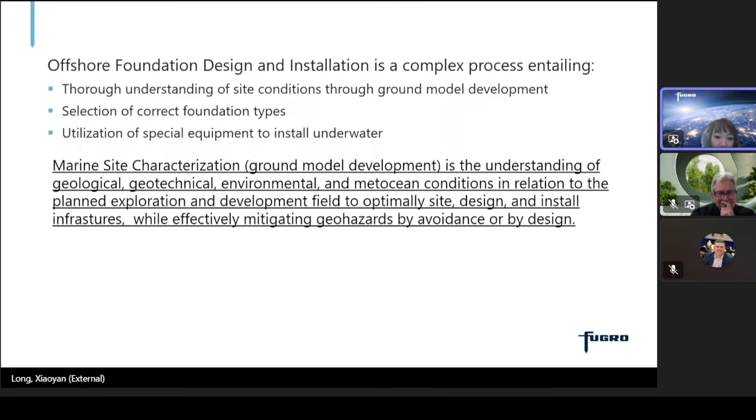Okay, so in the industry, typically we use what we call the phased diagnostic and geodata integration approach to develop a ground model. We also typically use some kind of GIS tool, so we can develop a comprehensive ground model, which will be able to identify, map, and assess the geotechnical constraints and also the existence of geohazards.

For the geophysical site investigation, we normally utilize echo sounder, side scan sonar, sub-bottom profiler, and 2D or 3D multi-channel seismic reflection survey. For geotechnical site investigation, we normally use in-situ testing, such as CPT, cone penetration test, PS logging and in-situ vane shear. We can also do sampling and laboratory testing to obtain the geotechnical data and the soil properties.

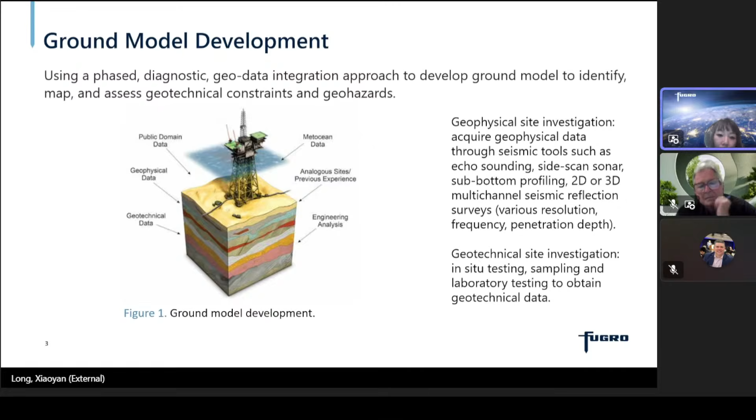So for offshore foundation design, basically two aspects need to be considered. First, we need to ensure the foundation will have sufficient holding capacity. Industry design guidance such as API, American Petroleum Institute, or ISO, International Organization for Standardization, have standards that specify the minimum required factor of safety through the entire design life, based on the different environmental loading categories. For the holding capacity analysis, we need to consider different types of environmental loading conditions such as static, cyclic, and dynamic loads.

Also for foundation design, we need to consider the installability. Even if the foundation will have sufficient holding capacity, what if the foundation cannot be installed into the seabed to meet the target depth? So basically the installability, and also whether the foundation can be safely retrieved or removed in case it needs to be. For example, if we install a suction pile and it has a little bit of tilt, so it doesn't meet the installation tolerance, then the foundation needs to be retrieved.

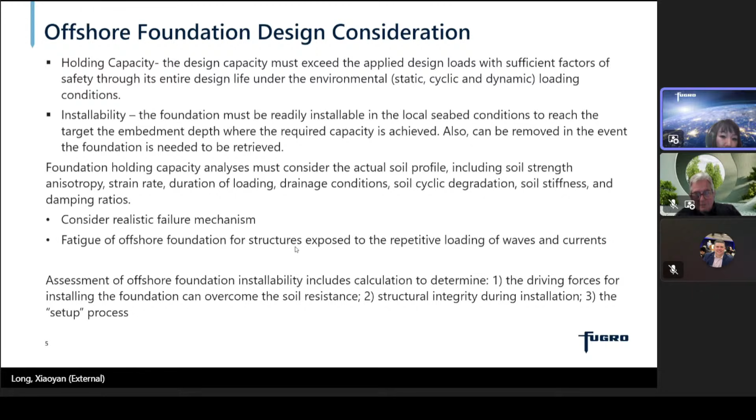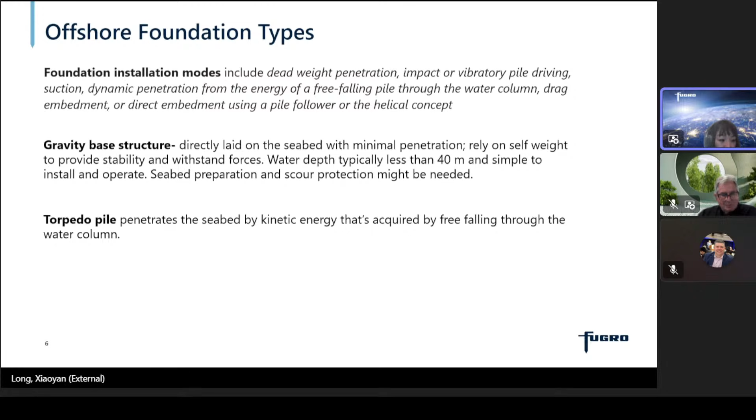For driven piles, we also need to consider friction fatigue, which is a degradation of the shaft resistance because of the repetitive hammering impact, and also the setup process.

For installation of suction piles in sand, we need to consider the interaction between the shaft and the tip. Also, because of seepage, there is an upward hydraulic gradient, which will cause effective stress reduction inside the pile.

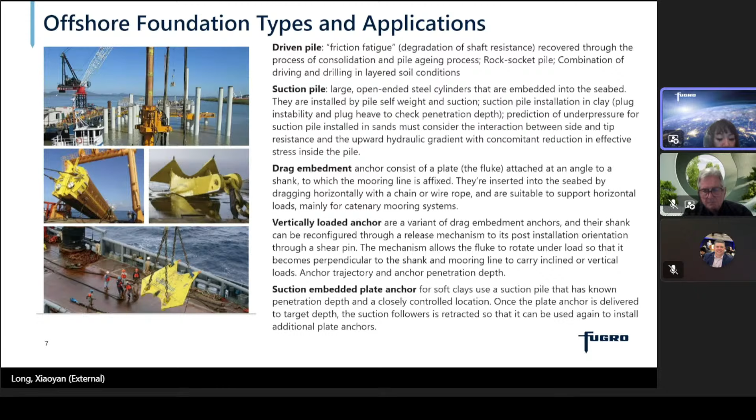Also shown here is the suction embedded plate anchor, which we call the SEPLA. SEPLA is actually a patent of InterMoor. Typically the SEPLA mainly targets soft clays. They use a suction pile as a follower to deliver the plate anchor to the target depth. And the suction follower can be retracted, so it can be utilized later at a different site.

For offshore drilling rigs, the spudcan foundation is very typical. A spudcan foundation is basically a saucer-shaped foundation. It can penetrate several tens of meters. The spudcan penetration process is affected by the spudcan geometry, metocean conditions, the holding period, the preloading sequence, and sometimes the existence of previous footprints, because of the structure-spudcan interaction. If we have previous footprints or nearby foundations, they could cause interaction issues, causing shear strength reduction, and compromising the spudcan foundation capacity behavior.

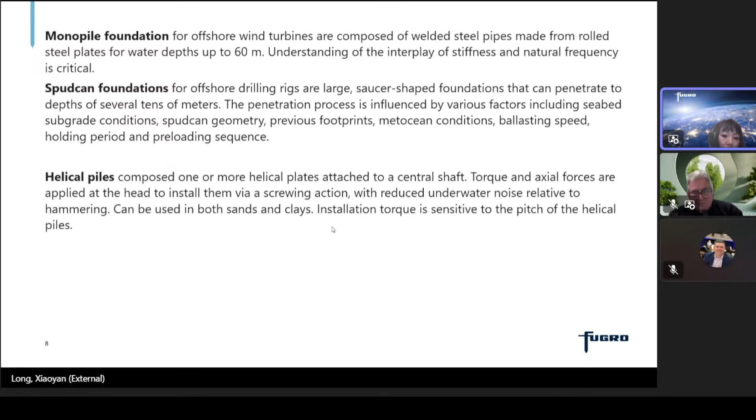So as shown in the previous slides, we have quite a few offshore foundation types to select from when we start the design process. For what we call the KPI, key performance index, of the offshore foundation, we need to consider the foundation holding capacity and the design condition. Basically, we need to consider the capacity efficiency, which is defined as the capacity divided by the foundation weight.

We also need to consider whether the foundation can be installed at a precise location. For example, a suction pile performs very well in terms of precision of positioning. However, with a drag embedded anchor, it's difficult to put the anchor in a precise location, so there may be some offset from the target location to the final installed location. Considering this aspect, the suction pile behaves better than the drag anchor in terms of precision of positioning.

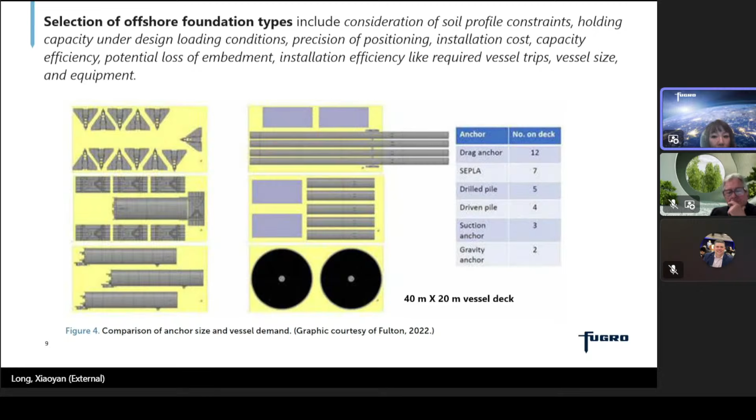So for example, on the 40 meter by 20 meter deck, we can hold 12 drag anchors, but we can only hold 2 gravity anchors. So for a large offshore wind farm, they will need lots of foundations. For a large offshore wind farm, they may need 150 anchors. So if we use gravity anchors, one vessel can only hold 2 gravity anchors, then we will have to do multiple vessel trips, and this is definitely going to increase the installation cost.

Okay, so now we move to our last point: the foundation technology advancement. So basically, because of the energy transition needs, and also the offshore facilities moving to deeper water, and also to what we call the challenging soil types, like the carbonate soil type, we need to have innovation.

So one thing for these technology advancements is we need to improve geotechnical foundation design practice, such as incorporation of the whole service life loading and the geotechnical capacity evolution. So basically, we need to consider, for example, the consolidation hardening effect due to this long-term process and the corresponding gain in holding capacity. And also in the industry, sometimes we use what we call the hybrid foundation, which is a combination of different foundation types, such as mudmat with pin pile or suction pile. This hybrid foundation can sometimes be utilized to improve the load bearing capacity and also cost effectiveness.